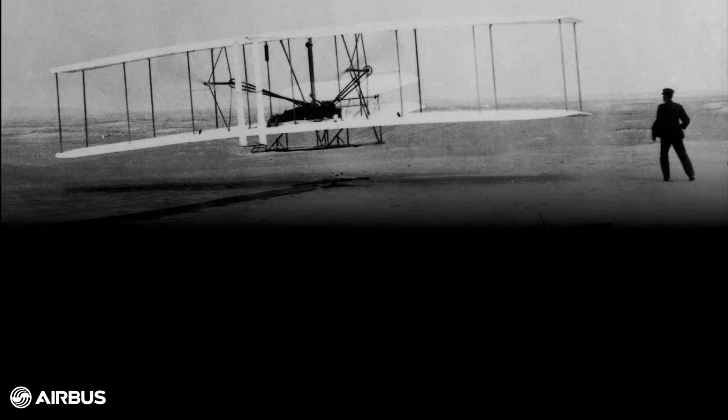Just some years later, the world saw this picture from the Kitty Hawk. It's basically a completely new invention, and two things came together: the combustion engine and a certain understanding about aerodynamics. But also here we find a very hard statement: no flying machine will ever fly from New York to Paris, which was given in

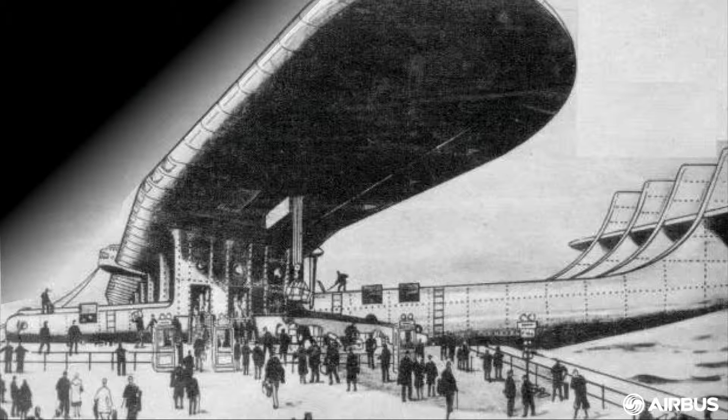1908. Just a couple of years later, people were dreaming about a kind of large aircraft which offers the comfort which you know from your living room. And it says here, it crosses the Atlantic Ocean in just 1.5 days. So now, think about sitting in an economy class seat for 1.5 days. So this is very painful.

Today, it's not a question if we can go from New York to Paris, but the question is more, can our customer sit in his jacuzzi or in his swimming pool inside his airplane and listen to some classical music? Well, actually, today it's the choice of our customer.

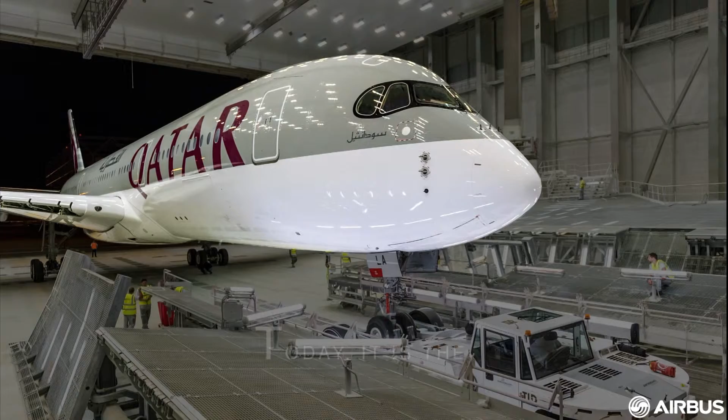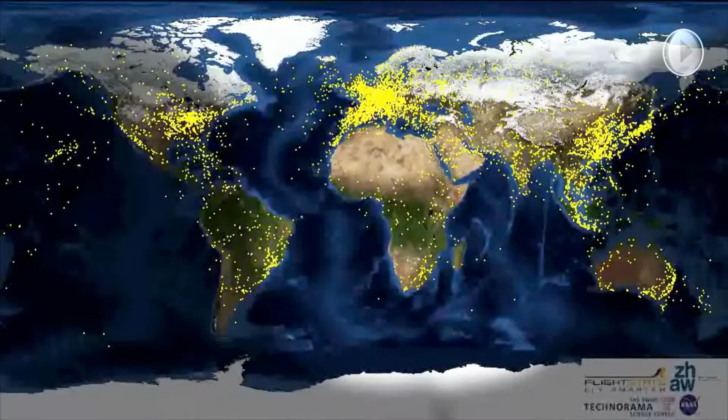So when we are thinking about a new kind of aircraft concept, we ask ourselves, what does the world in 2050 look like? So we see that we have more than 9 billion people living on this earth, and a lot of them will make money and spend this for traveling. So there will be an increased demand for traveling, and the expectations on commercial flights will be higher than today.

So we wanted to start with a passenger and design the aircraft around him. So what are the future passengers? Before we come to this question, we have to think about what can we do in terms of passenger needs and technology. So we call this consumer-centric approach, and we started with a passenger. So let's meet the future passengers.

So women will play a major role in how commercial airplanes are designed in the future. More than 70% of women will go for higher education, which basically means that from 10 students, 7 students will be female in the future. And as a matter of fact, we will see more female business travelers.

In some areas of this world, the population is getting older and older. We have this trend very strong in Japan, but also in Germany and Italy. So we have a kind of graying society here. And a lot of these people save their money, and when they are retired, they can spend this for traveling around the world and enjoy their life. So also here we need to meet the expectations and the demand for these kind of people.

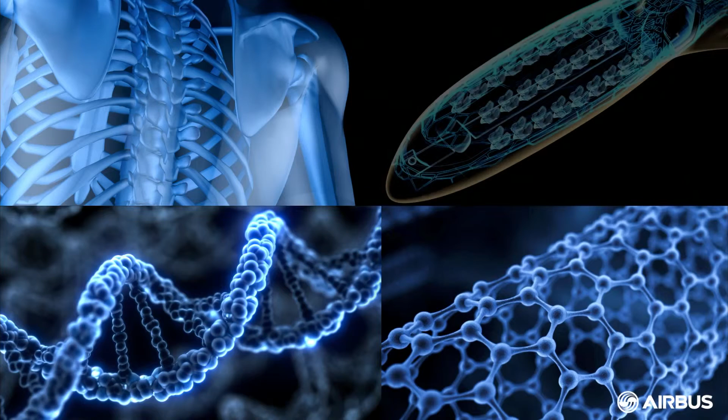So our building blocks could be carbon nanotubes in the future, which are as big as DNA. And of course, the vision is clear: to use this material and build a large rivetless skeleton out of it. We managed today to print carbon nanotubes inside a 3D printer. We do this with the University of Exeter in England. We have trillions of them, and we call them aligned woods of carbon nanotubes.

At the next level, we can use these woods and make a kind of morphology optimization, which basically makes the material transmit energy and act as a sensor. Then we take state-of-the-art topology optimization, for instance, and build larger and larger components in the future. That's basically the idea behind it. It works in a laboratory, but you never know. In the future, we might have the chance to use a large 3D printer and use this material to print structures out of it.

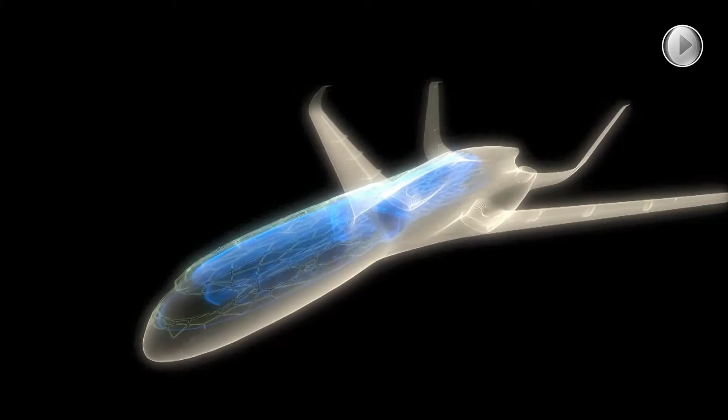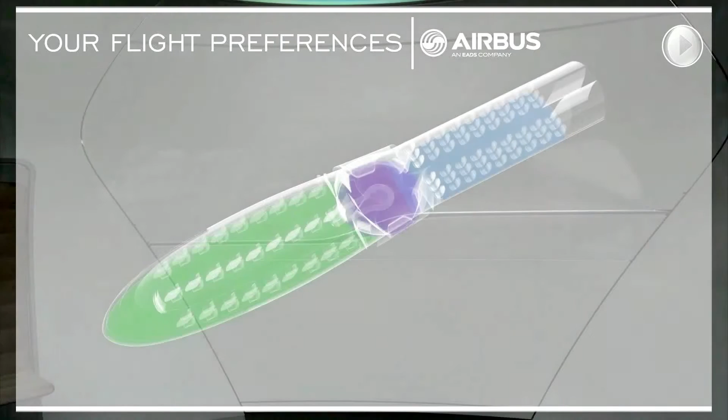Our vision for the concept cabin combines different kinds of technologies. 3D printing is just one of the ideas behind it, and I just want to show you a short animation of what you can expect from the future. We have wide central doors, and you are welcomed inside the boarding area. You don't need a boarding ticket anymore. You're recognized by your DNA or by your fingerprint or whatever. The technology is available. Luggage is very annoying, so we want you to get rid of your hand luggage right in the entrance area and make the boarding process more convenient.

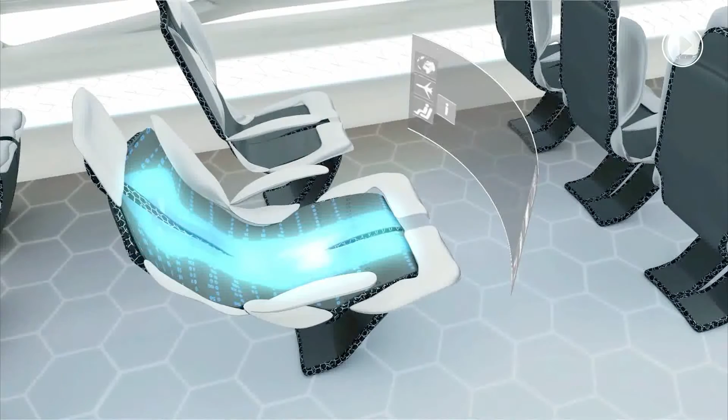The reconfiguration of the cabin is very essential for our customers, the airlines. So if there are some empty seats, we can wrap the empty seats together and offer more leg room. We have a lot of morphing materials here, which basically address the needs of passengers who are a little bit larger.

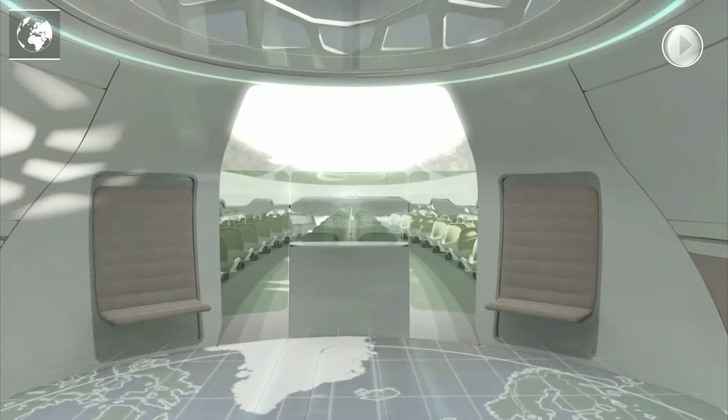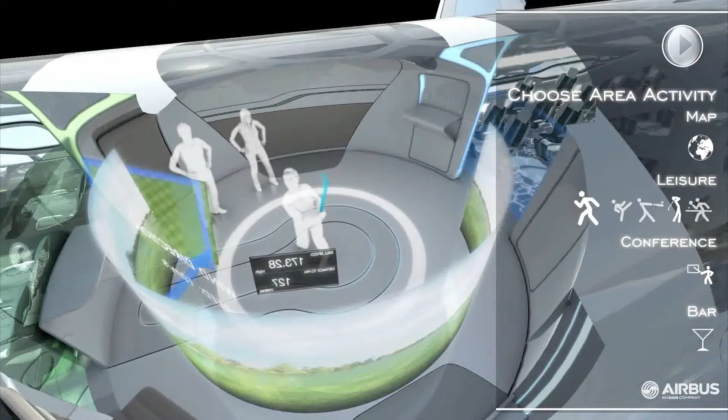During the flight, the entrance area turns into a kind of Disneyland, I would say. We put digital wallpapers everywhere, very thin displays, which we could put on the floor, on the walls, on the ceiling, wherever. And by offering this technology, we can easily reconfigure this area. So you can play golf digitally. Don't laugh, we had a real putter challenge inside an A320 once upon a time.

Well, this is my favorite scenario, a bar scenario, which offers a kind of advanced outside view of the airplane, so a kind of sky lounge. I guess this is very cozy. But the real highlight comes in the front of the airplane, which we call the vitalizing zone. We don't have first class, business class and economy class anymore. We want to offer a very exciting view out of the airplane.

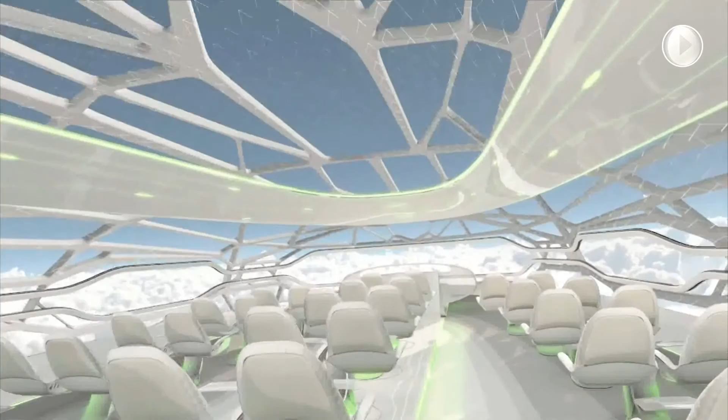So if you ask the people, some of them are getting afraid about this vision, some of them feel excited about it. So the entire environment is very responsive to the passenger. So for instance, when you're getting blinded by the sun, you can make a kind of gesture, and the cabin membrane, which covers this bionic structure, is turning opaque in some areas. We don't have a cockpit anymore.

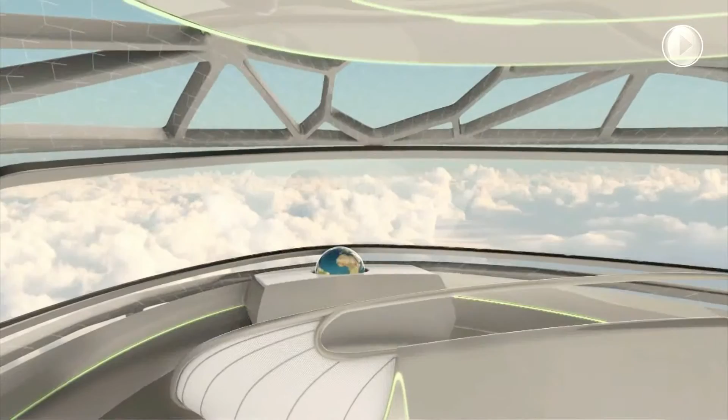When you look at the comments on YouTube on this video, for example, you will see that there are some pilots who are really getting mad with us. So there are two answers on this. The first answer could be the cockpit is somewhere else in the airplane, so in the cargo area, for example. The second answer is, in the future, we maybe do not need pilots anymore because we fly highly automatically.

And well, we like to bring the passenger back where he is actually. So I guess an airplane is the best place to watch the stars at night, and so we really hope that we are getting the right materials and, basically, also the right method behind it in terms of optimization to help us to make this vision come true.

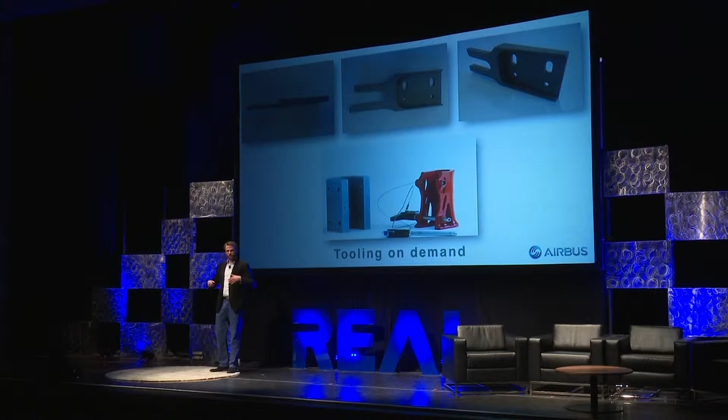So in the next step, I want to give some details. So this vision is quite large, but we are starting small. The first thing I want to show you is tooling on demand. So I would call this high-tech, low-cost prosthesis. So you don't necessarily need to lose your leg if you want to wear a kind of prosthesis.

If you're a blue collar at Airbus, you will be able to have a kind of prosthesis which you can stick on your finger and which helps you to disassemble or assemble stuff inside the airplane. And this works quite well. It's cheap and you're getting the right tool which you need. It doesn't need to be necessarily always a screwdriver.

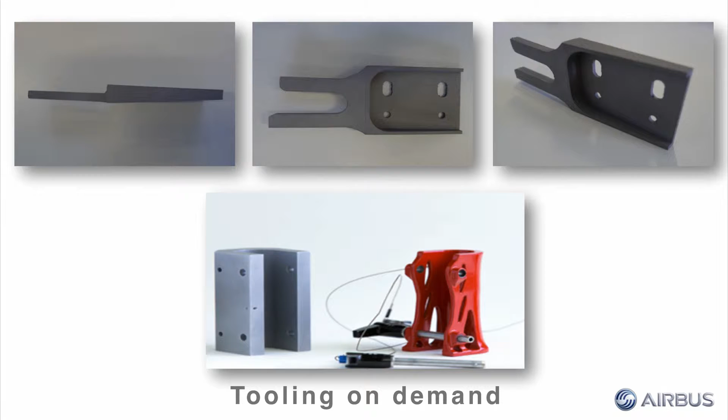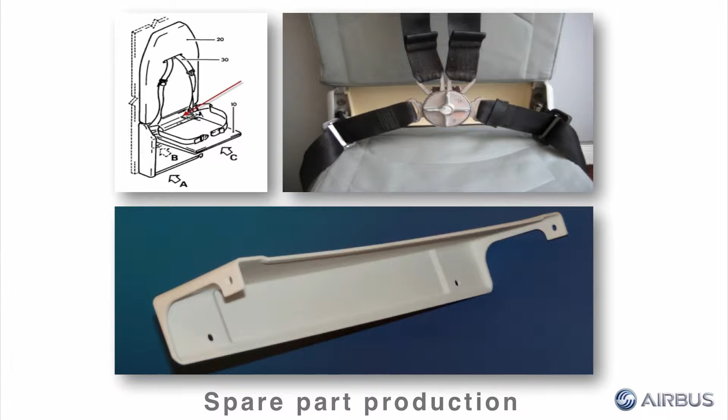This is our first spare part which we have been producing. We call this belt mold. It's designed for an Airbus A300. This airplane is 30 years old. The supplier went bankrupt, and new tooling for this part, because the old tooling was destroyed, would cost more than 40,000 bucks. So we said we'd like to print this kind of belt mold, and we used the FDM procedure for it and applied a little bit of post-production, and we easily can create spare parts from it.

Our vision is clearly to reduce the stock holding of spare parts down to 30% in the future. And each year we are getting more and more parts to achieve this. So digital stock holding is a big issue here in terms of 3D printing.

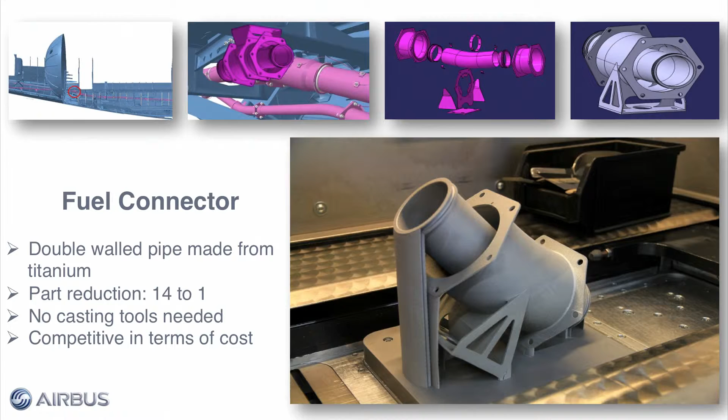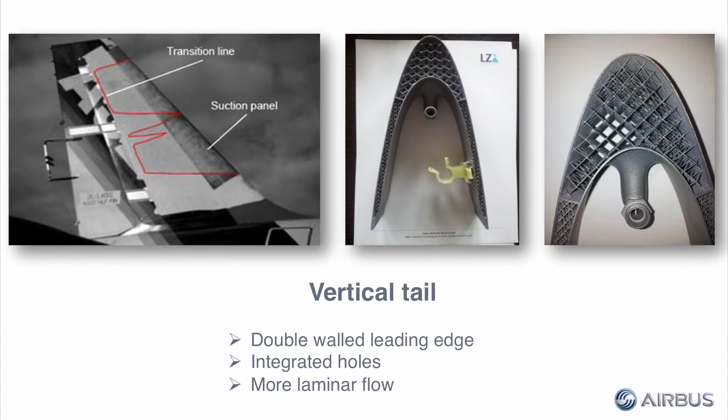We have the possibility here to make some micropores in the leading edge of this part, and you can see that in the back there is a connector to stick a kind of ducting to it, and then we can suck out the air of this double-walled leading edge wing, which improves the aerodynamic performance of our wings. This also works quite well.

This is basically our highlight at the moment. This is a bionic bracket. We are absolutely proud of this bracket. At the same time, it's the biggest disappointment for our structural engineers, and I want to explain why. So first of all, we are very proud because we are winning a lot of awards with this technology.

So we print metal here and bring this into commercial airplanes. We were among the finalists of the Innovation Award of the German economy last year. So this bracket was designed to hold 1.7 tons. We added a German Angstfaktor to it and designed it to resist 3.4 tons.

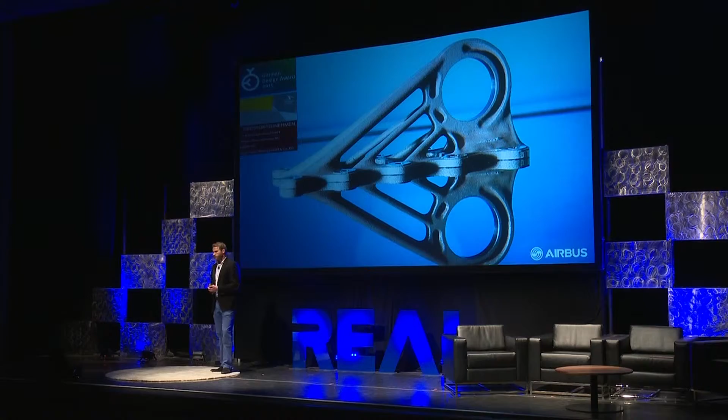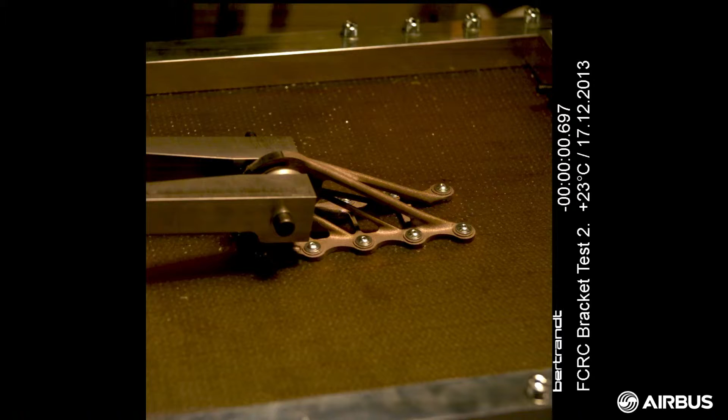So then we put it onto a testing device, onto a machine which can apply forces of 10 tons to it. I can show you a picture here. This is the installation, and it was really surprising. So at 6 tons, the screws which attached the bracket to the panel there were flying away. At 10 tons, the machine crashed down, but the bracket was still in one piece.

Then we put it onto a bigger machine, which can apply forces of 100 tons, and at 12 to 13 tons, this part was breaking. But it just had to hold 3.4 tons. So it's oversized by factor 4, and that's why it's a big disappointment for our structural engineers, even if this part is 50% lighter. So the question is, how do we have to design this to meet these 3.4 tons?

We are doing a lot of stuff in terms of scanning. So what you can see here is a water lily, the Victoria water lily. It's basically the biggest water plant which you can see in a botanic garden. So we went there and we wanted to scan this to understand a little bit the procedure and the design of it.

So it's time to learn German. Listen and repeat. Die Königin der Seerosen, the queen of water lilies.

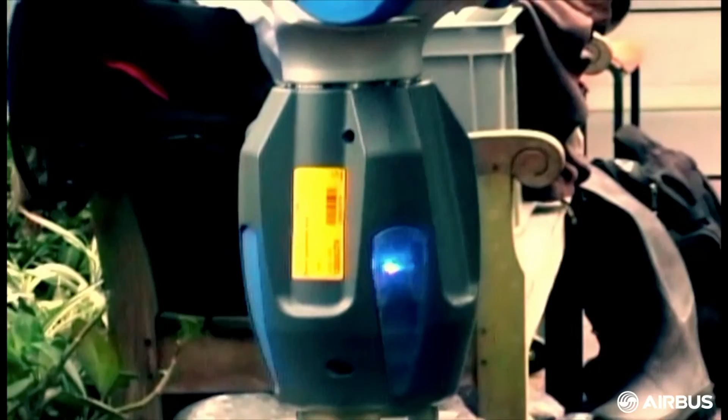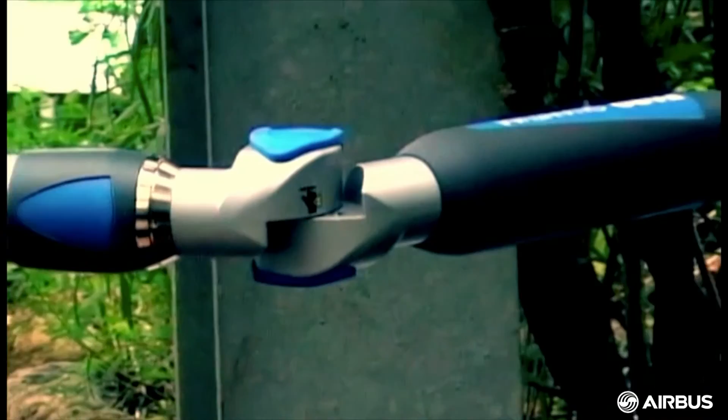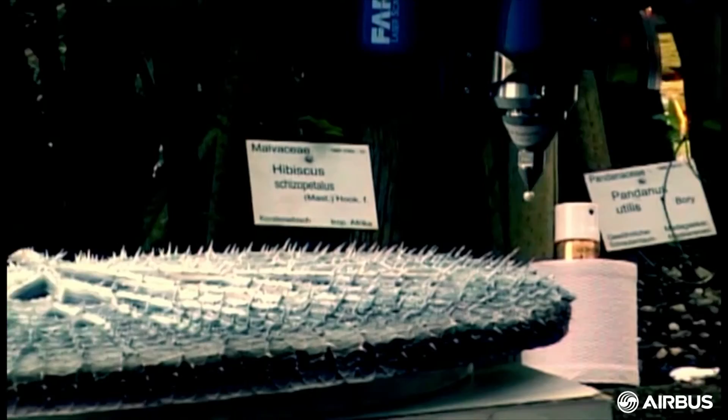It worked quite well. It was an amazing project. And also a completely different approach how to create and understand structures at the end of the day. So here you can see one of my colleagues scanning the water lily. They are very strong. So maybe you can see some pictures somewhere on the internet where children are sitting on this water lily. If you want to do this with your child as well, make sure it can swim. So it's very, very stable.

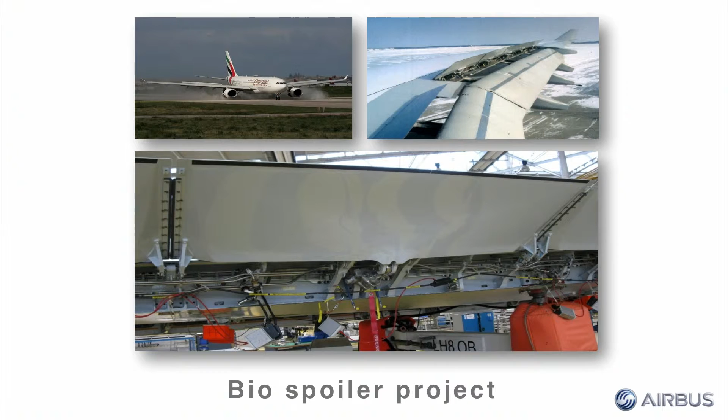And what we are doing with this, we integrate this kind of design procedure into spoilers. So we call this a biospoiler project. And this is basically the result, a completely different kind of structure inside a spoiler of an airplane. The spoiler is really important. If you want your airplane to stop at the end of the runway, you need this part.

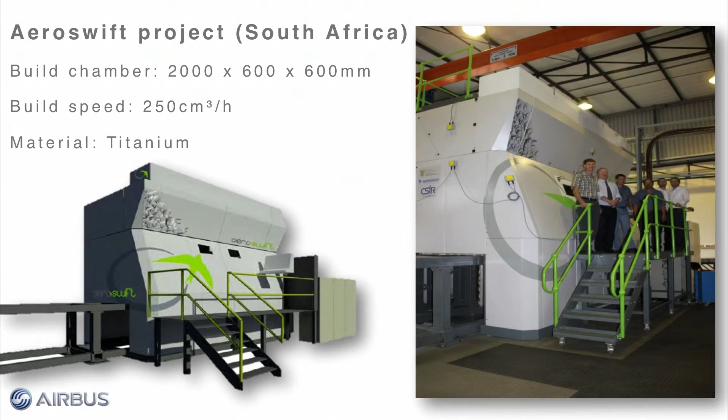And we will print this on this kind of printer. It's a project with Aerosud in South Africa. I have to translate the numbers to you. Unfortunately, you're not using the metric system. So the build chamber is more or less 7 feet times 2 feet times 2 feet. So it's quite large. It's a very, very fast printer, and we will print this spoiler this year on this machine. We use titanium here. And this is very exciting for us to see the printer size is growing. The printers are getting faster and faster and make the production of those parts easier.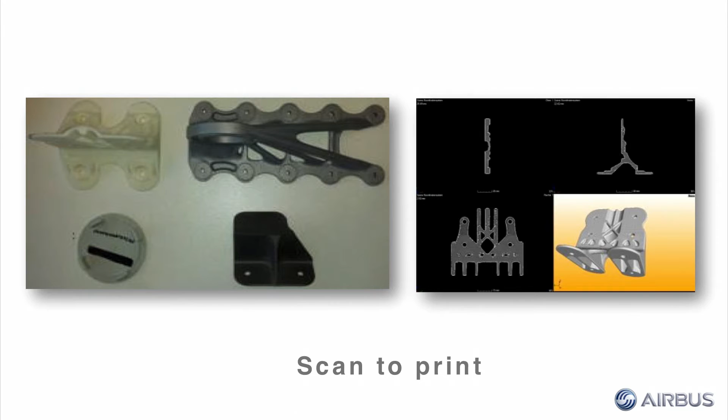So I'd like to come to an end by giving another example of how we are using scanning. So at the right-hand side, you can see some micro CT pictures, and the results we are getting from this were really astonishing for us. When you are printing a part, you always have a certain kind of porosity in this part. When you apply micro CT to it, you are scanning also these kind of holes inside the part, and later on, when you print this part again, all these holes are printed as well.

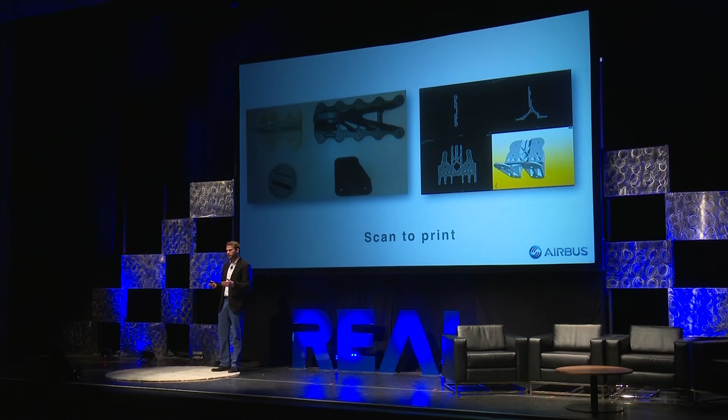So there is a kind of danger in violating IP, for instance. It's not a big deal in the aviation industry, because every part which we deliver to an airplane comes with a ton of documentation. So it's very hard to certify copied parts. But at least we have to take care about this, about copying things and violating IP and all that stuff. So we like to encourage our engineers to think big in a certain way.

So all these samples which I've been showing have been created in the last 2 years. And it's quite amazing for us to see how the community is growing. And let me close with a statement of Jason Silva. He once said, if we can imagine it, why not make it so? So we are encouraging our engineers and also want to encourage you, go into this technology and help us to print an airplane in the future. And I believe this will happen.